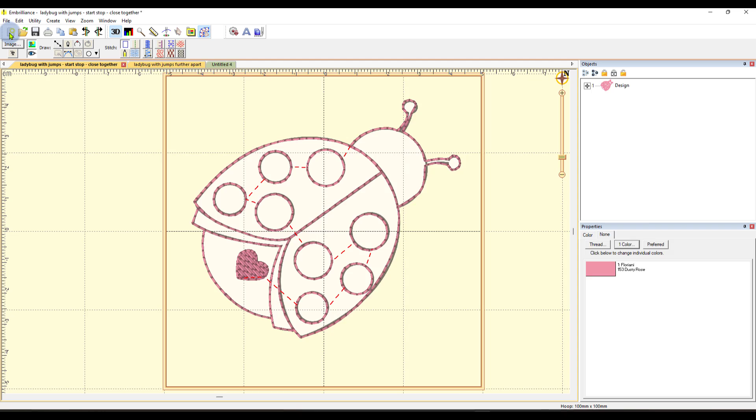Let's get started. So the first thing I want to show you how to do is to get started. Let's open up a new page by just coming up here and clicking on new. Opens up a new page. Now I'm going to bring in an image, the background image.

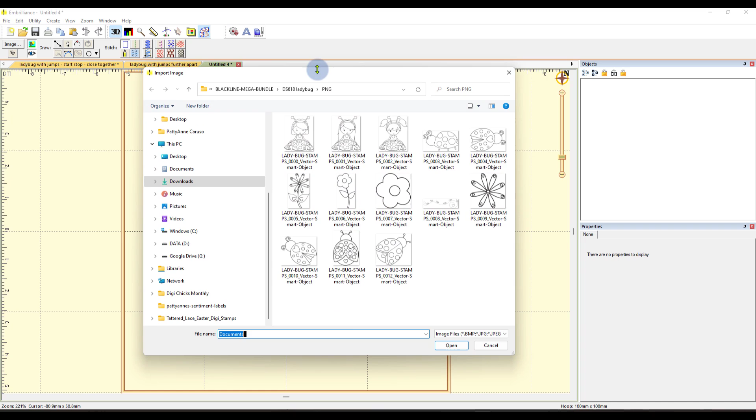And I have to have the create mode on. So if I don't have this little thing right here that signifies create or create design clicked on, I won't be able to see over here where I can bring in the image. So I've got to click that on, and now I can see the word image here, and I can browse for it. I got it from Creative Fabrica, so the image I used is this one right here, and I'll say open.

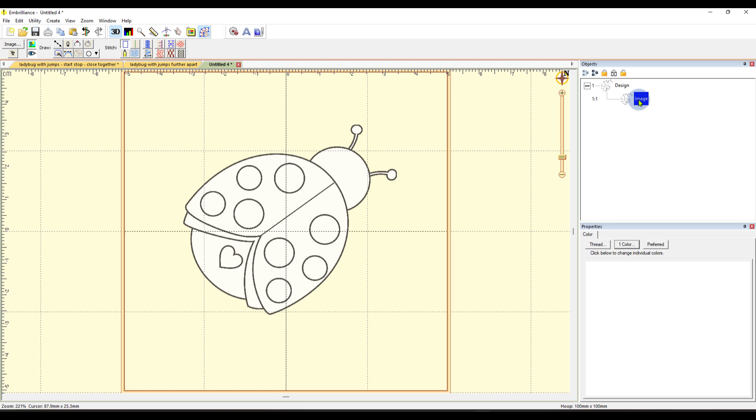I did go ahead and change its size a little bit, just about like that, which is good. And the next thing I can do if I want to, if that's too dark of an image and I won't be able to see very well where I'm placing my stitches, I can click on this image, and notice over here that opens up the properties box, and I can change its transparency. I can make it so transparent you can't even see it, or just make it a little bit transparent like that. Hopefully you can see it well enough. So say okay.

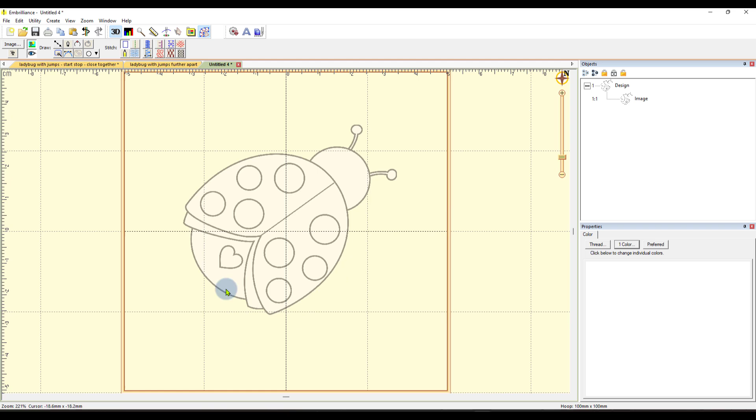The next thing I'm going to do is figure out how I'm going to go ahead and stitch this. I'm going to scroll in a little bit because I'm going to start down here. So I've got to put my create mode on again, and I'm going to come to here which says draw with points. I'm going to start right here and click. Every time I click, it's going to put down a node or a stitch, and I don't have to put too many because it'll fill in the blanks. When I get to the end of where I want to be, I'll click and then right click, and then I can come up here and say put a run stitch on that. Notice over here it's a run stitch, and I'll do that a little bit more slowly in a second.

I don't want it to just be a plain run stitch or a single. I want it to be a bean stitch, and I think I'll make it a 3-pass bean, which means it's going to go forward, backwards, and forwards. Notice on this, it's going to start stitching right here, and it's going to end right here.

The next thing I wanted to do is this line right here. I need to come up here to create, draw with points, and start right here, click. I'm going to hold down my shift key because this is a corner or a cusp, and that will allow it to work really well. Still holding down shift because there's another corner here, and another corner. Then I right click to end it.

You're saying to yourself, that looks really crummy, PattyAnne. Well, we're going to fix it in just a jiffy. First, we come up here and put the run stitch on. Automatically it remembers what we used last. Then when I place my cursor over that stitching line, there's that backward S that allows me to move these perfectly, just like this. Now that looks really good.

The thing is, let's check this out in the stitch. Let's go to View and Jumps. Notice there's a jump stitch right here now, and in my final product I didn't have any jump stitches. So how can we fix that?

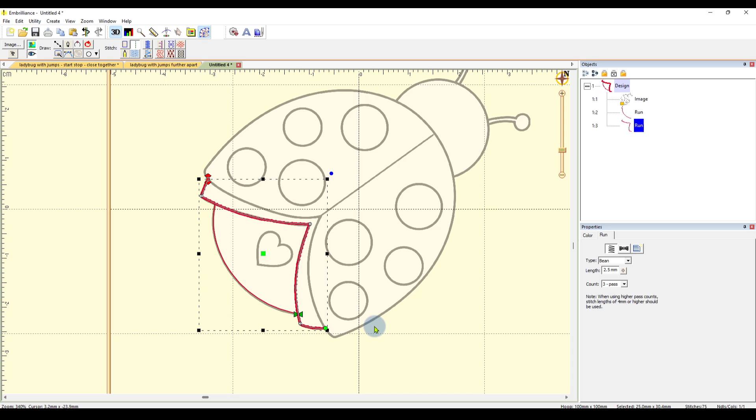Let's check it out, go back here. Here's where this one ended, and this one started over here. I'm going to change that starting position to there, and now notice there aren't any jump stitches. The jump stitches are shown by those little dotted lines, so I'll show you that again in a minute.

Let's see what's going to happen now. It's going to do that, and then it's going to do a single stitch till it gets over here. Single, single, single till it gets here, and then it's going to start doing the bean stitch again. That's perfect, just what we want, and it ends right here.

So now I think I'll start right here for the next part. That's kind of far away—I could start right here if I wanted to and end, but I think I'll just start right here and let's see what we get.

Again, create, draw with points here. I'm going to make this a cusp by holding down my shift key, going around here and here. Notice that it's not following these edges very well, but you saw how easy it was to fix that. Hold down shift for another corner or cusp, and hold down shift here, and then right click to end it.

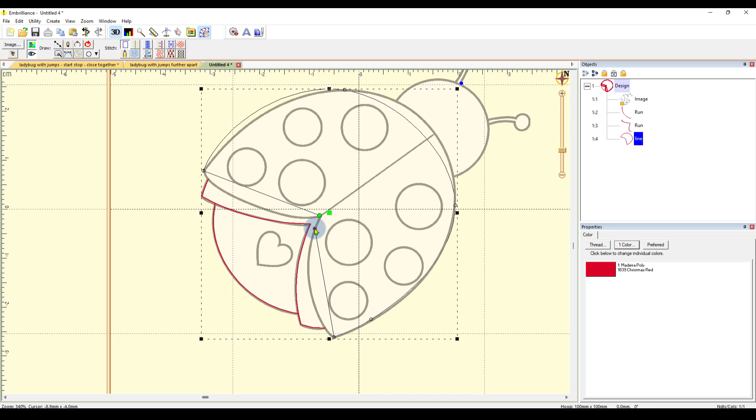Now I didn't bring these two pieces together perfectly, and I didn't want to. I wanted to end it by coming up here to this little thing that sort of looks like a tomato, and it says close open outline. When I click on that, it's going to close this outline perfectly. Can you see that red line that's in there now?

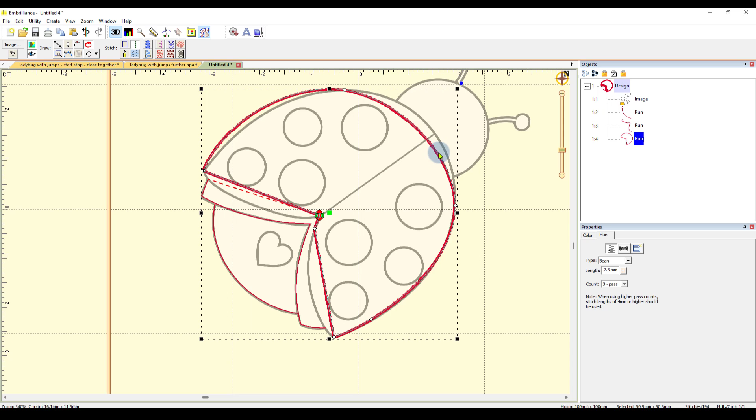So I'm going to change these to run stitches again, and there they are, beans, and I'm going to fix these. Remember, when I get the little backward S on the line, I can move it—whoopsie. My computer wasn't cooperating, there we go, now it's working well. So again, just move these into position where I would like them to be.

I hope you're noticing the big dashed line, which is showing where the jump stitches are. We had it stitch this second part like this, and it ended here, and then it jumped way over here to start. Well, I can fix that. Watch—when I have that green bow tie selected, I can drag it right over here, and the jump stitch is gone.

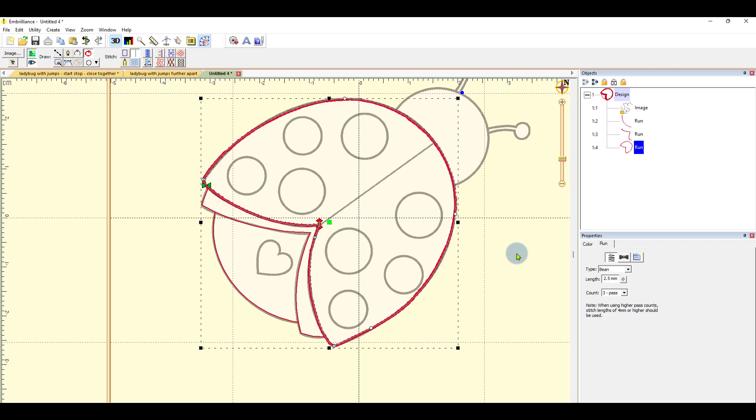So again, if we would do the stitch simulator, go like this and that—oopsie—all the way around like that.

See what it did at the very end? It went with a single stitch to there, and then a bean stitch back.

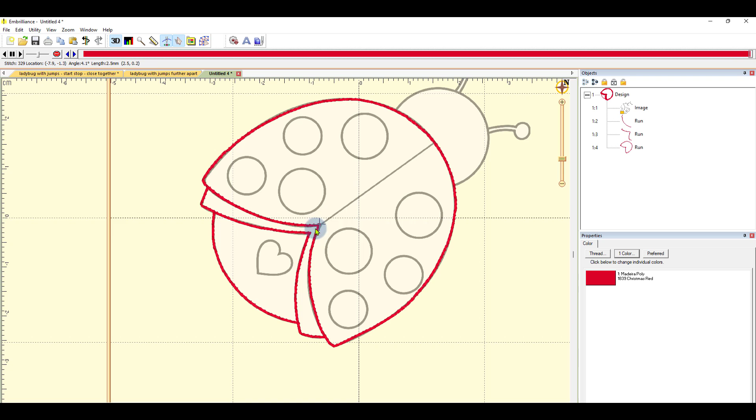So now we're ready to do this straight area. Again, clicking on create, draw with points, start here, hold down my shift key and go right up to here. Then I right click to end it, and then I can make it stitches just like that.

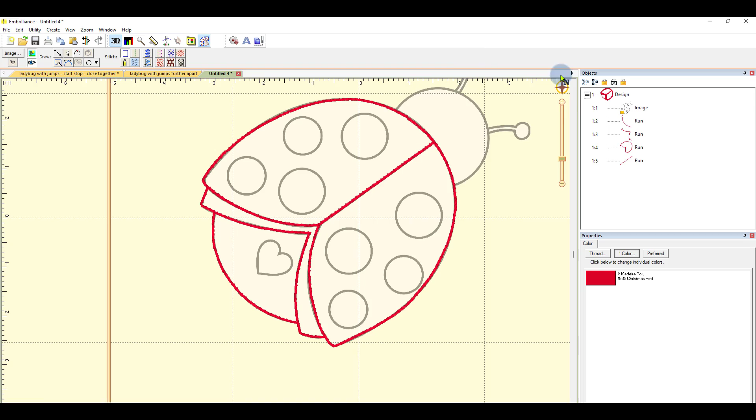Perfect, so my last thing ended right here. So what I can do now is go over here and get draw with points, and draw here, here, here, click to end it, and I'm going to make that a run - simply a single run like that.

Then I'm going to start here, back to my bean. So I'll go here, here, shift, shift, around the circle, shift, shift, shift, shift, around a curve, shift, shift, and round the curve to here, and end it.

And then make that - we'll go back to the bean stitch for that, and the 3-pass bean. I need to fix this line, and let's see how that's going to work now. Should work perfectly. So we're going to go through the beginning stuff again quickly till we get to here.

Notice, let's go now here - notice that, well, it went too fast. Let's go back. Okay, notice right here it's going to be a single stitch, not a bean stitch.

So it's coming up bean - see it double back and forth on itself. Then it's a single stitch, and then it starts the bean again. And we didn't need another bean here because there was one already.

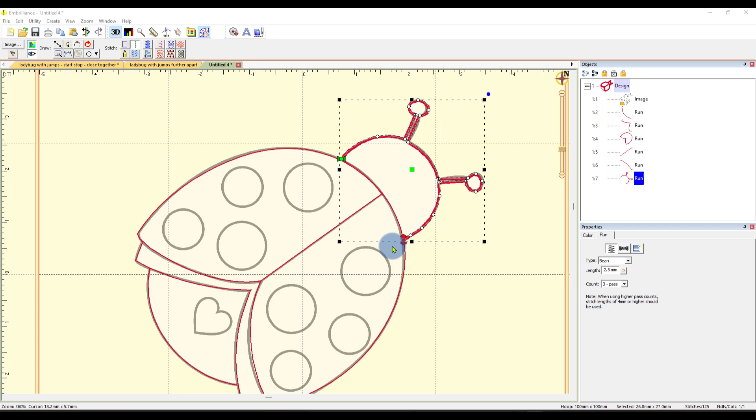So from this bow tie, I'm going to go to this circle. I'll come up here to this area, there's this drop down menu, grab the circle, hold down my shift key because that will make a perfect circle, just like that. Now it doesn't matter if it matches that circle exactly because nobody's really going to see that circle.

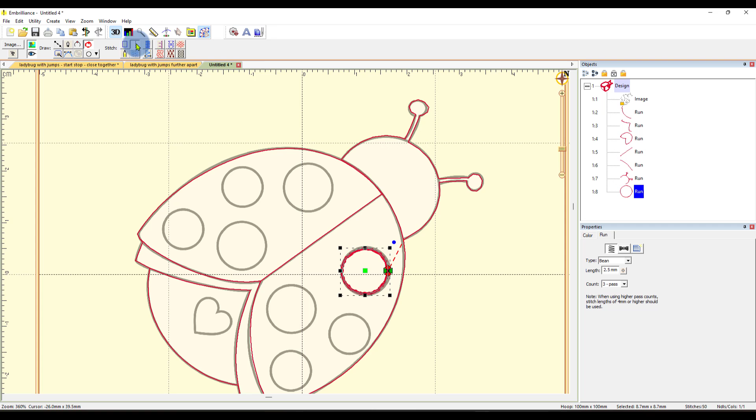So once this is done, I can put the run stitch on by coming up here, and you can see how long that run stitch or the jump is. And I believe that's long enough that it is going to be cut.

So I'm going to take this bow tie and move it down here. So when it does that, it's going to stop here, and I can go to this next circle.

So I'll come up here and draw another one out by holding down my shift. Bring that right here. I can bring my start here if I want to, and my stop - whoopsie - stop down here so I can go to this one next.

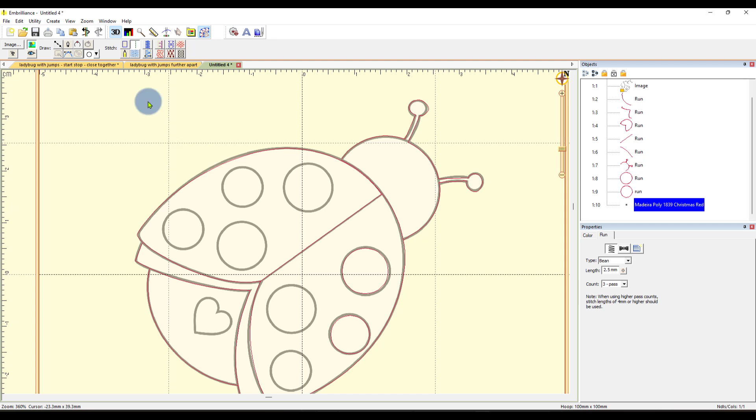So again, I'll get another circle, draw it out, and get my bow tie that's red to stop it over here, and draw one more out. Then the rest of the circles on the other side I'll do later.

But I did want to do the heart for you because I did that a little bit different. So there's that. I'm going to make it stop over here so it can get close to the heart, but not on top of it, because I do want that jump to cut.

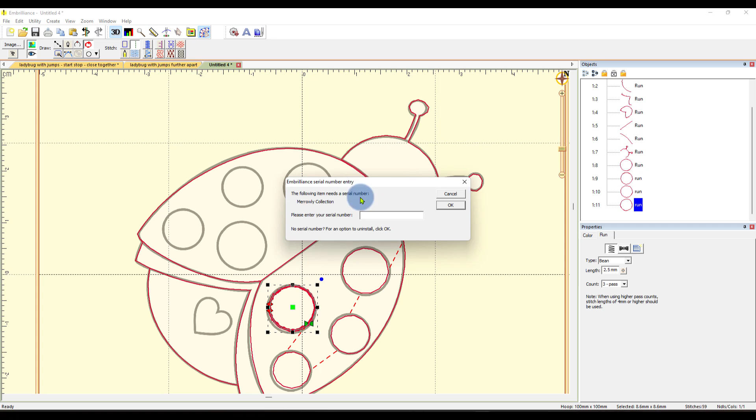So for the heart, all I did was come up here to our library, and I have the Merrowly, the patch maker - that's why this will pop up, you won't see this box.

So then it's going to open up, and I don't know which one of these drop down things it will open up in for you. So you want to go to outlines and scroll down until you see the hearts, and there's all the different hearts that you can get.

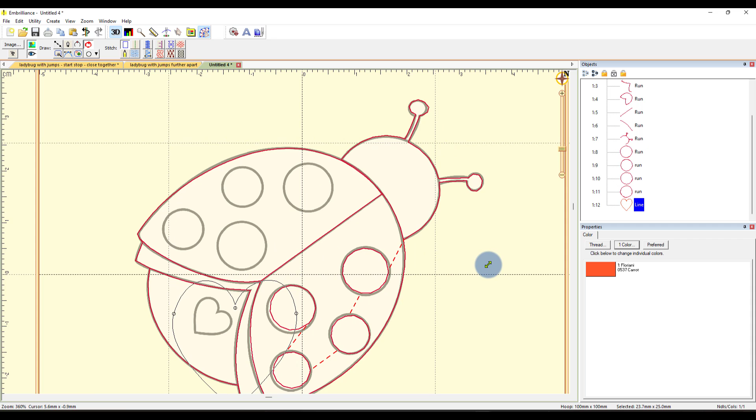I just used this one here. I double clicked on it to bring it in, and then I started squishing it down by using one of the corner boxes like we do, holding down my shift key to move that.

Okay, holding down my shift so I can bring this around, make it a little smaller, and twist this so it's going the same angle. Make it smaller, see if that's about the same size. Just about—twirl it a little bit more. That's pretty good, so I'm just going to leave it. I'm happy with that.

Next thing I'm going to do is fill this. I'm going to come up here to the fill. Look at that—it fills it automatically with stitches just like that. These yellow things toggle the angle at which the stitches go.

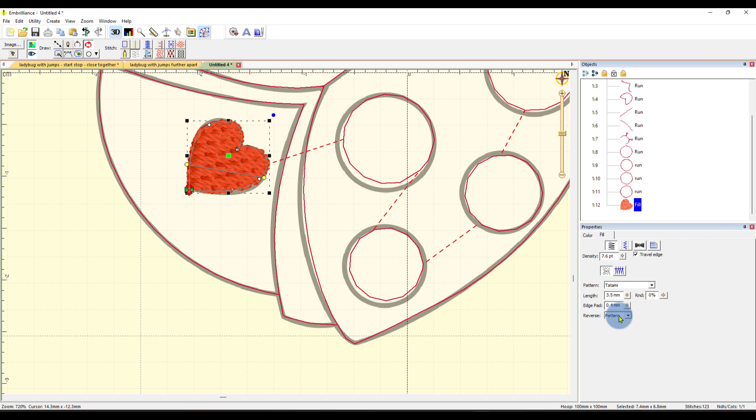I'm going to make mine a little less dense because this whole thing isn't very dense. Actually it would have come in around 4.5, which is quite dense—at least that's what it came in for me originally. So I went ahead and changed my density.

Now as you up your density, that means you're increasing the amount of space between the stitching lines. Right now the density is 4.5 points, I guess. I'm going to go up here to 11 and you'll see. So the density is measuring how much space there is between the lines of stitching. I'm going to leave mine about 7, I think.

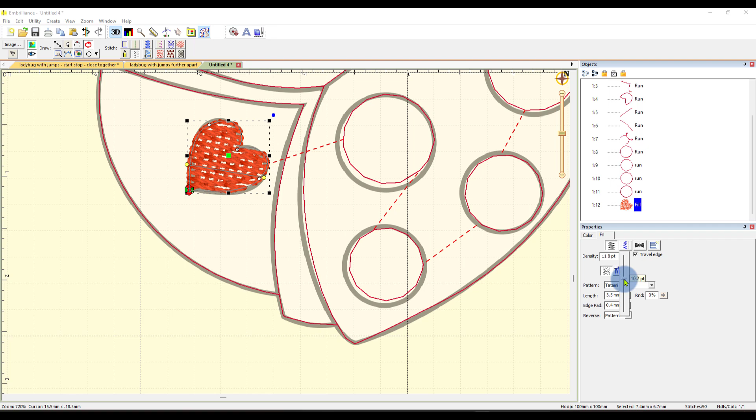Just willy-nilly trying something. Remember, as Lisa Shaw always says, do your stitch-outs so that you can learn from them. The other thing I wanted to do was this.

Originally, travel edge was off, and you see how that looks sort of messy? So I decided I'd put travel edge on, right here, just like that.

That is good. So I'm going to change its color though, because I want it to match what we've been using. When you click on the little color chip, I want to go to palettes because I want to choose the same red I've been using all along, and say OK.

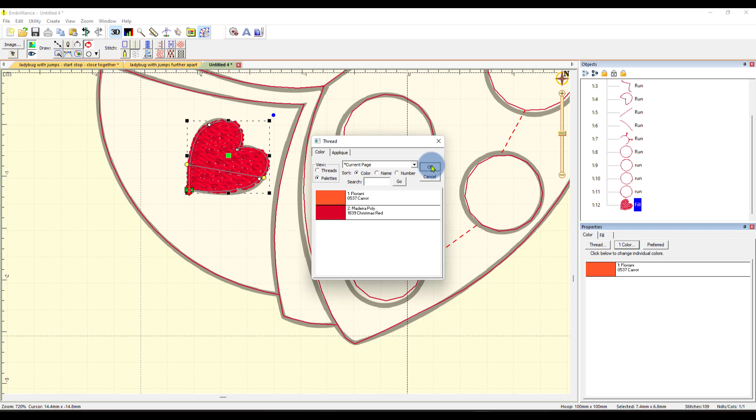All right, let's see how this is going to go now, and then I think we're done for today because I don't believe you need to see me stitch out any more of these circles.

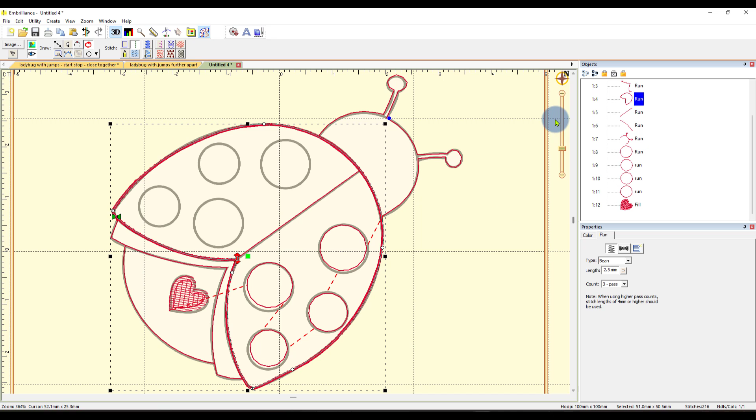So let's go—if I hit the letter A, that makes all of it visible. Don't forget, if you want to see your hoop but you don't, you can always hit the letter H. That'll bring the hoop up or make it invisible.

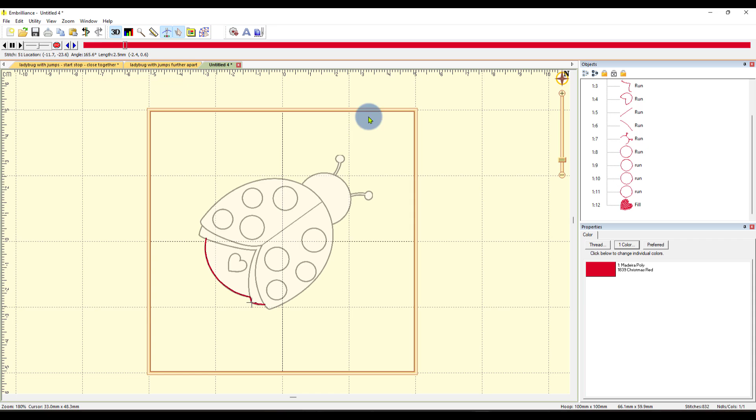Just hit the H. All right, so let's now go ahead and watch this with a stitch simulator, and then we'll call it a day. I'll make it a little speedier, and scroll in just a little bit more. There you go—you can see it's doing the bean stitch, and it's doing the bean all the way around. This is so much fun, you guys.

If you haven't tried this yet, I highly recommend it. Actually the stitch-outs turn out really cute as well. You know, it'd be cute to make like even a quilt or something with these on it, or a baby bib, or a dog collar, or a little pocket book. I can see all kinds of ways we could use these.

So there it's going up at the top, and now it's going to do that single stitch to the left, and then some more bean. If you have a machine like mine that cuts jump stitches, it will cut all of these jumps—you won't have any you'll have to cut because we have them far enough apart. Remember in the very beginning of the video I showed when I had the jumps too close together, that's when my machine did not know it was supposed to cut those. And here comes the bit of the heart—first comes the underlay, and then the fill.